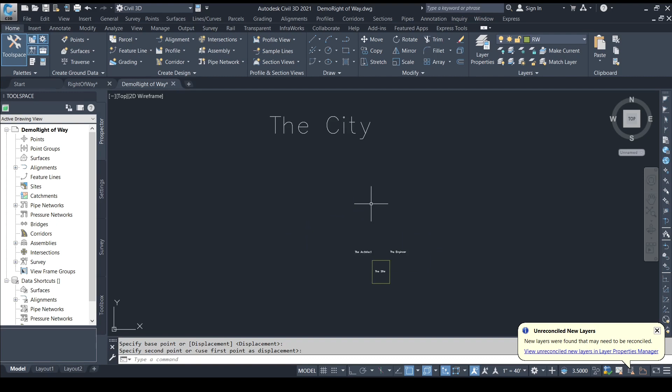Our next presentation is based on a proposed multifamily residential development, which for purposes of this discussion, shall be discussed in a way which applies in a global context, not within any particular area. That being said, the geographic location of a project is a driver for many of the engineering judgments made by

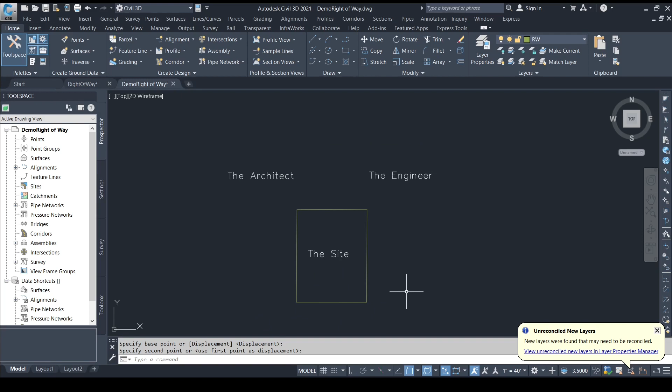the land development engineer. The early planning for most land development projects is typically done by an architect, or architectural company. We may refer to such individual or company as the architect. Similarly, the land development engineer, either individual civil engineer or civil engineering company, shall be referred to as the engineer.

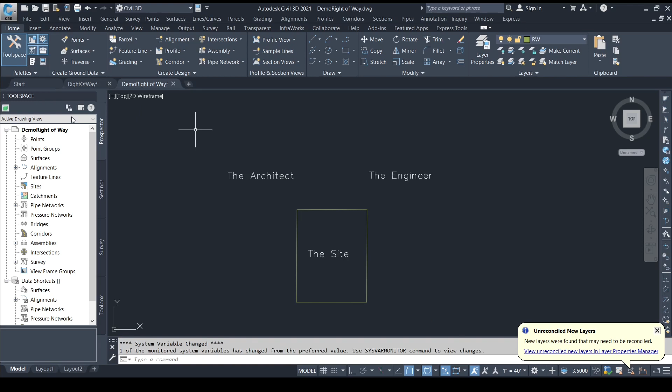The architect has provided a layout for a series of buildings and an interior road network. The land development engineer looks at the line work as if the building is essentially a kind of black box. Keep in mind that there must also be a structural engineer employed for the residential buildings and other buildings. This is to differentiate between the site engineer and structural engineer. This is quite often two different companies or individuals.

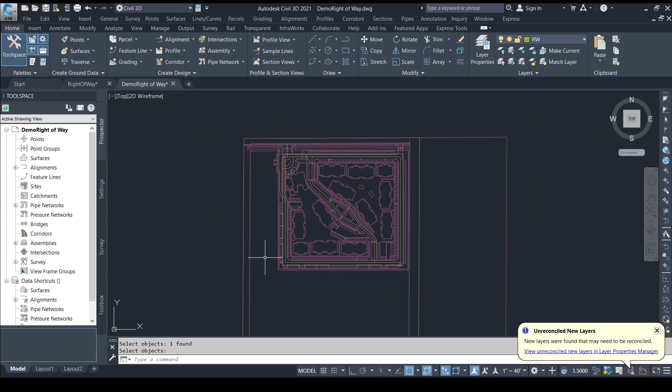Generally, we can assume that the larger the project, the larger and more complex the contractual framework becomes between the various consultants employed. Looking at the project from the land development engineer's perspective, the building is viewed in terms of a building footprint. The entry points and access to the buildings are main considerations of the land development engineer, but building interior is within the architect's scope of work.

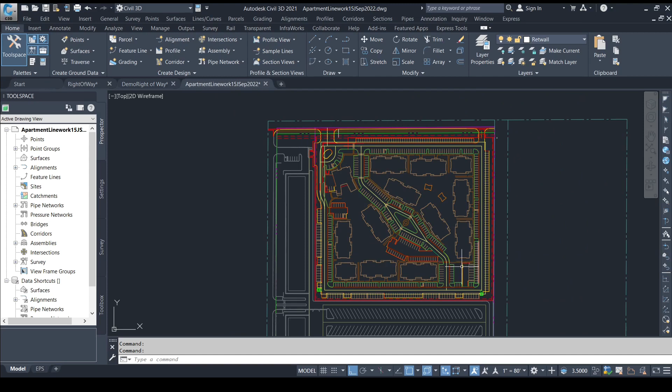We will introduce the concept of site line work, which, as the name implies, is a drawing containing only lines and no text. The site line work drawing may be viewed in different styles depending on what we want to emphasize, or de-emphasize, on a particular presentation. The actual drawing file for site line work would appropriately contain different colors for different building features.

Two of the most relevant line work features would be the building footprint, and the curb face line work. The curb face generally delineates the paved areas within a site, or at least provides a sense of site layout which we intuitively grasp once we view the site line work drawing.

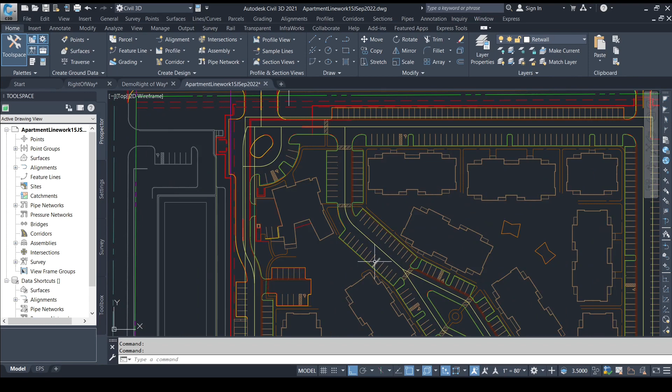It has become common practice to maintain the site line work drawing as an X-reference which may be loaded onto various other drawings. The goal will be to prevent other users working on the project from inadvertently moving or rotating our site line work. If the master site line work drawing is changed, it will automatically be reflected on all drawings which contain that drawing as X-reference.

When we X-reference our site line work drawing into another drawing, we can change all the colors of the X-reference drawing to one color so as to recognize it as appearing as an X-reference. The CAD program typically helps us to visualize what is being X-referenced by reducing the brightness of X-referenced content. We can further assist ourselves to recognize X-ref content by changing all colors of one X-reference to a single color, preferably a pastel color.

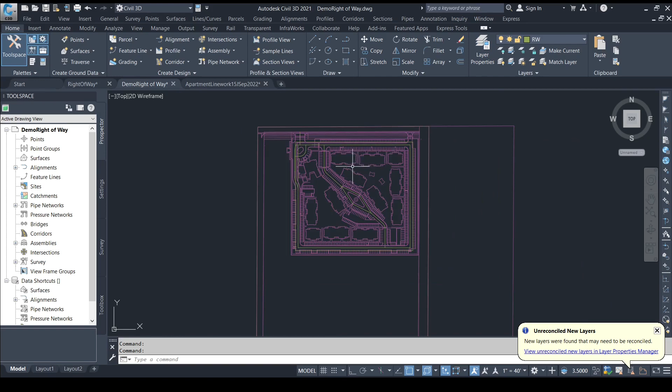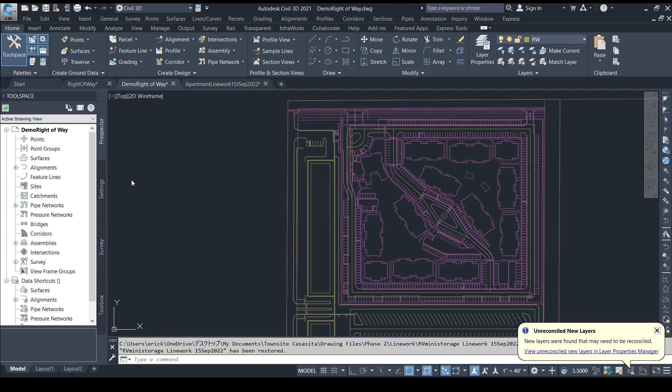Land development often occurs in phases. Therefore, drawing files of site line work may be separated into multiple files. It is becoming clear that file management is one of the key considerations when creating design for land development projects. In this case, there is a second phase development being considered which influences design of the first construction phase. We show second phase line work as X-reference with different color to help visualize the limits of first and second phase.

To summarize this presentation, we have introduced the concept of site line work as separate drawing files to be X-referenced into our drawings as a first step in creating land development site civil design.